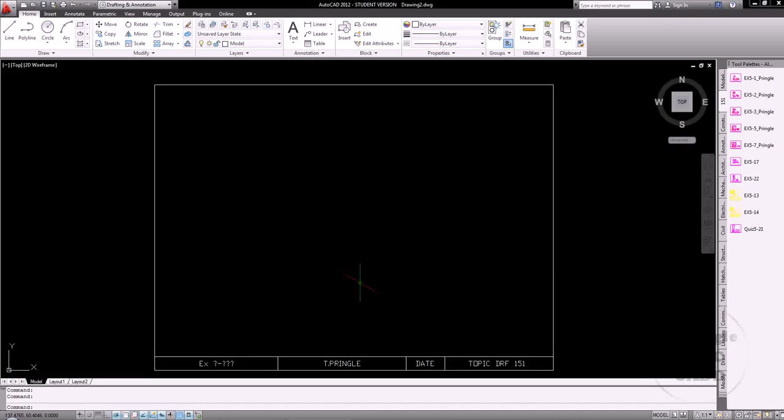To complete the isometric for exercise 5-23, the first thing I'm going to do is start by drawing my 100-degree line, that's going to be along my 100-millimeter line along my 30 degrees. And then from there, I'm going to go up 30. This is going to come in 40.

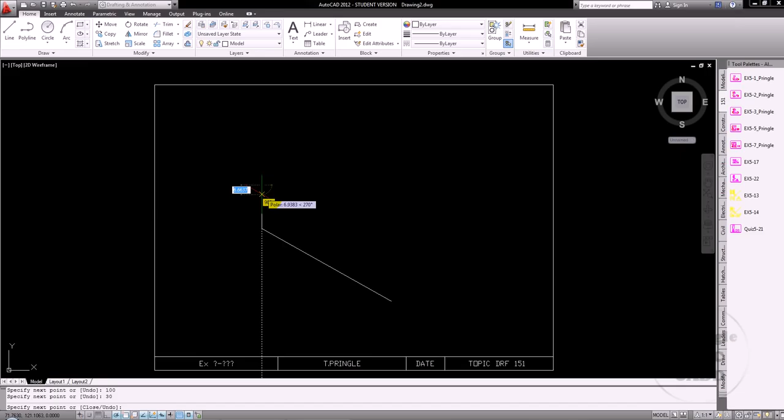It'll come in 30, goes up 20, across 40, and then from there it is going to go down 35, and it will come back out here to the end.

Now, to save myself a little bit of time, I'm going to copy all of my top trailing edges, basically any edge that I would see from the other side of this object. And I'm going to copy them along that 30-degree line, a total of 50.

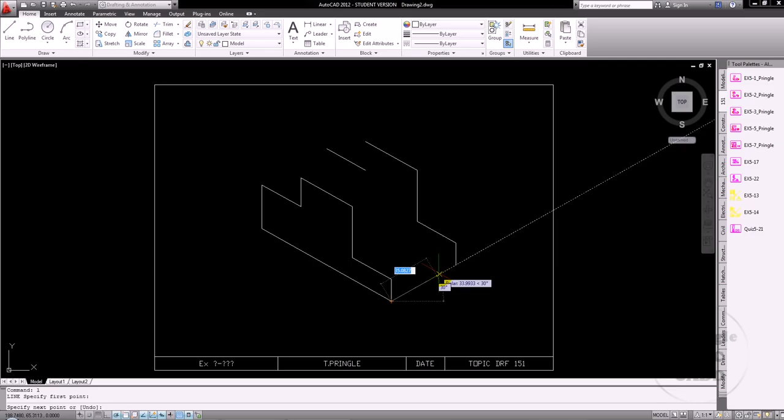Now I can begin to draw in the lines that are going to form the rest of this shape. So all I'm doing right here is connecting my dots corner to corner. Got an extra line in there. Okay, so there's all of my connect-the-dot style lines.

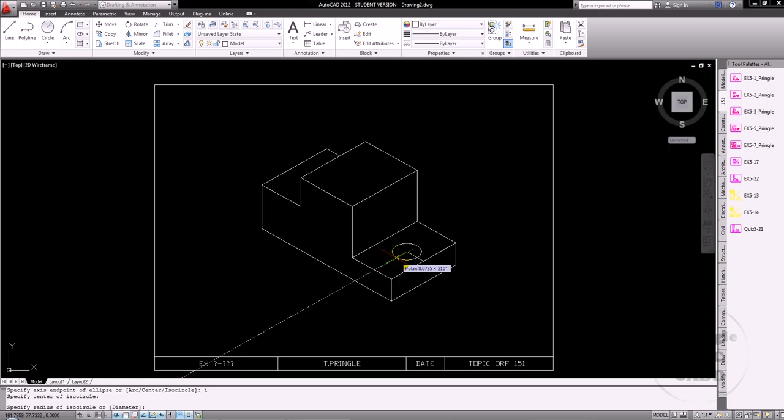Now I'm going to draw a line that comes from here and goes in 13, since I know that that is centered, but it's 13 in. Now I'm going to hit Control E to change my ISO plane to the top, and I'm going to go to the ellipse command, use the ISO circle option. There's my center, and I know that this thing has a diameter of 20.

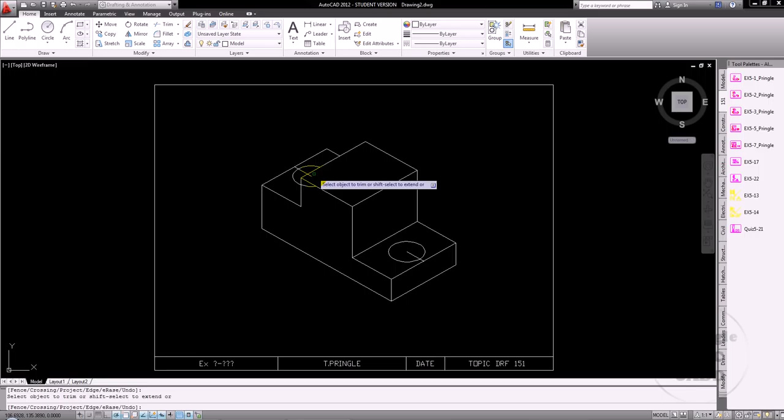Well, rather than try to mirror that, I'm going to come up here and draw another line in 13 up here. And then I will copy this from this endpoint to this endpoint. Now I can begin to trim out some of the lines that are not necessarily going to be used in that view, and I will get rid of this and this.

Now the hardest part of this is going to be this top section right here. And dimensionally I know that the hole that goes down through the top is centered. So I'm going to center that, and it has a diameter of 30.

Now this is really where this one is going to get complicated, which is going to be at the front piece of this. Now I know that this thing is 20 centered, so what I'm going to do is start a line that's going to be 10 off of this corner that's going to come in slightly. So I'll hover over that and type 10.

Okay, now I know that this thing here goes down 15, over 20, and then straight back up to the edge. I can now take and project this back along that 30 degrees until it intersects with my hole. Okay, so now I've got basically the beginnings of how this thing is going to look at this point.

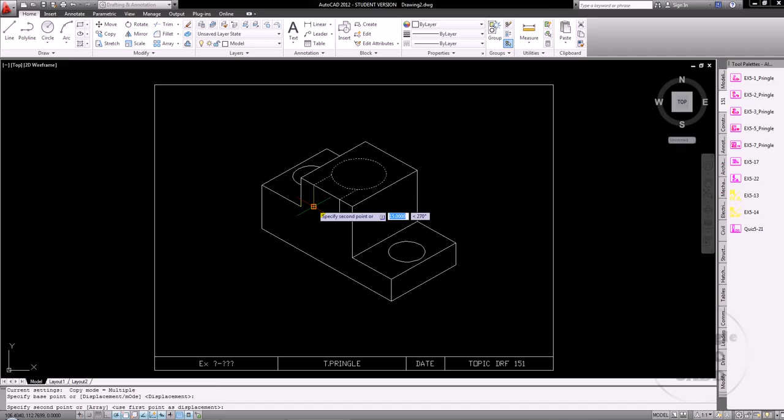Now, I know that I need to copy this, this, and this all down from here to here. Now, some of that's going to go away, and you'll see what's going to go away as I begin to trim this object out. So I'll start my trimming commands, and I'm going to get rid of the front part of this, but I'm going to get rid of the back part of this.

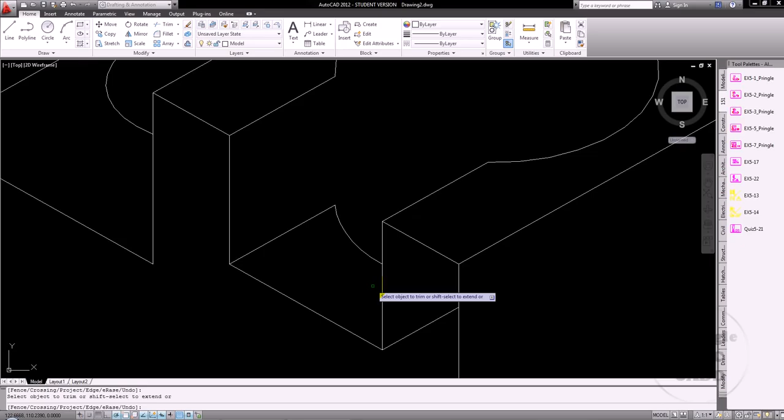And then just kind of getting rid of all the other stuff that's not necessarily going to be visible. This line is going to go away before everything is said and done. Trim out this little section here and this little section here. All I need to do now is draw a line that connects these two points. And what you can see there is the rounded edge that's cutting through this bottom piece as well. And I'll get rid of this.

So this here we have is exercise 5-23. The only thing left to do on this is to go ahead and dimension it, center it, oblique all of the dimensions, and you're ready to go.